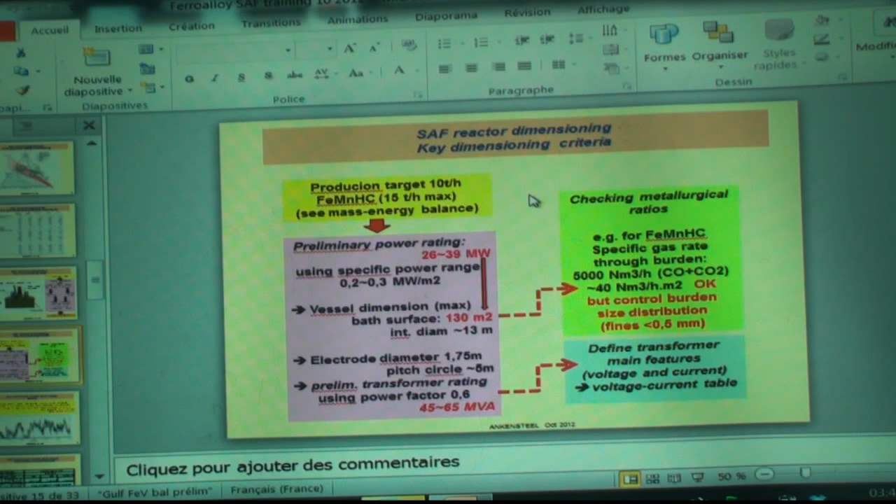So yesterday we were here. I explained that using the mass energy balance and defining production target, you can define the required power, and then there was a discussion whether

putting a margin on the production target or putting a margin on the surface to have an improvement potential from 200 to 300 kilowatt per square meter specific power rate.

The specific power rate of 200 to 300 kilowatt per square meter, of course, is a kind of empirical result of production. But if you read all the papers I sent you, coming from publications of constructors like Demag, like Pyromet, like Hatch, you will see that these figures are really industrial figures, and they are based for dimensioning furnaces. The industrial furnaces really work like this.

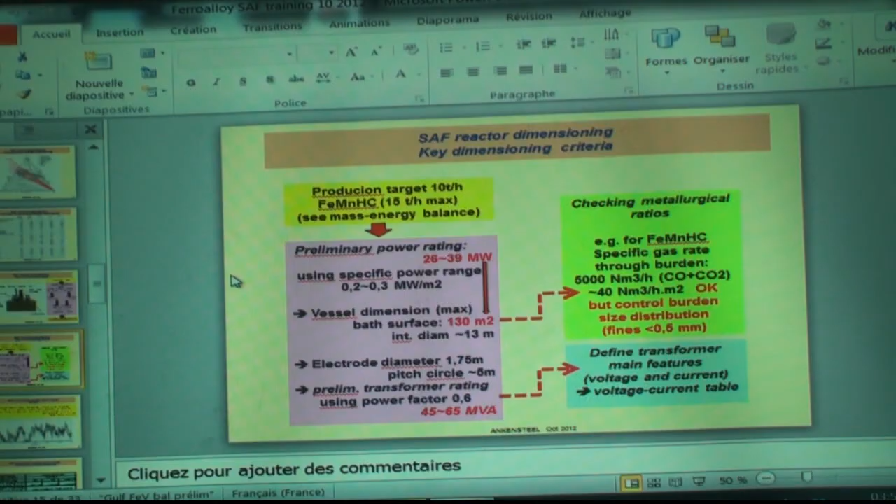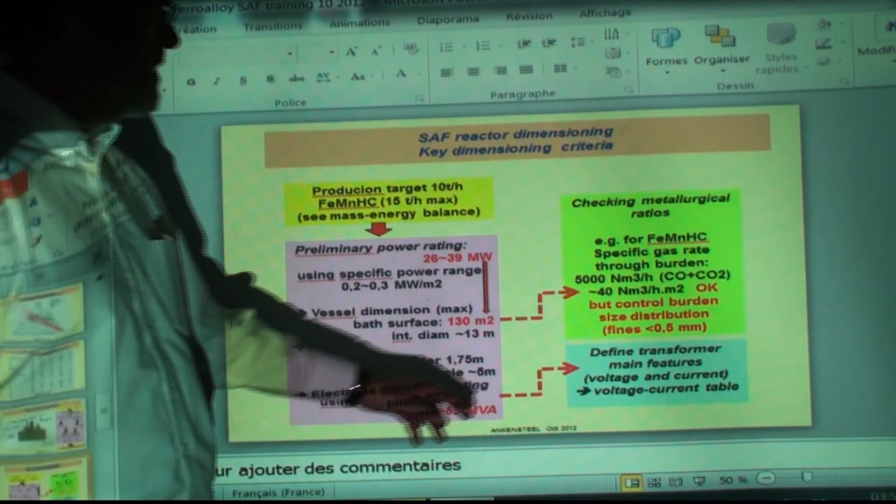Okay, then we discussed the preliminary transformer rating, and Mr. Jin said, yes, but that's not enough. It's not enough to define the MVA. No, of course, it's not enough. And we are continuing to define not only the transformer main power figure, but also to define voltage and current to be used by the furnace.

The power supply constitution of a SAF, like it's suggested here by Mr. Jean, is the same as that of an EAF. But of course, what is important is to define appropriate voltage and current. That may be different. And what are the very basics of this?

First, again, to maximize the specific power rate requires to really obtain arcs, to have submerged arcs, and not only electrode immersed in slag and giving only a resistive Joule effect to the slag.

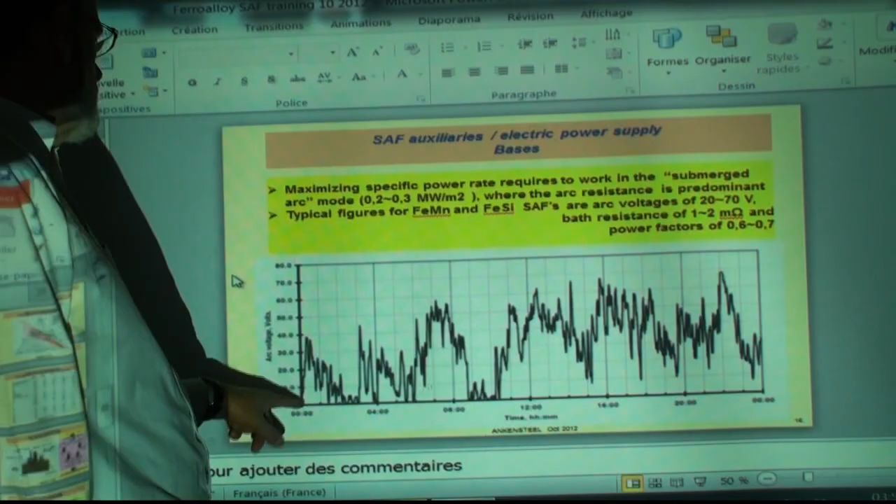The typical arc voltage that you can obtain in ferromanganese and ferrosilicon, but also ferrochromium furnaces, are arcs of 20 to 70 volt. This is typical, and this is arc voltage measured on a ferrosilicon furnace over time. You see, of course, it may vary, but on average, it is 30 to 40, and the fluctuation is mostly between 20 and 70 volt.

And the time scale here is in hours, 4 hours, 8 hours, 12 hours. So when they did these detailed measurements, this was a real important result, because before, people were always struggling, saying nobody was inside the charge to see the arcs. So this was really important to measure, and it has enabled also to establish the level of bath

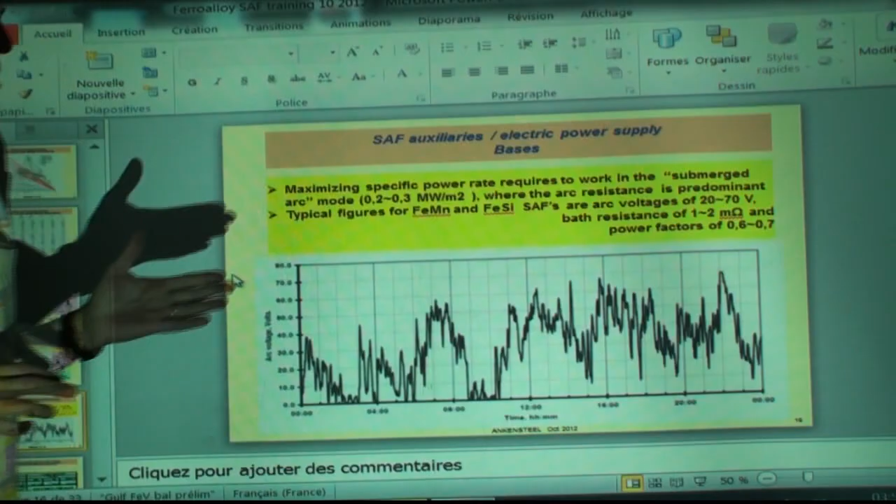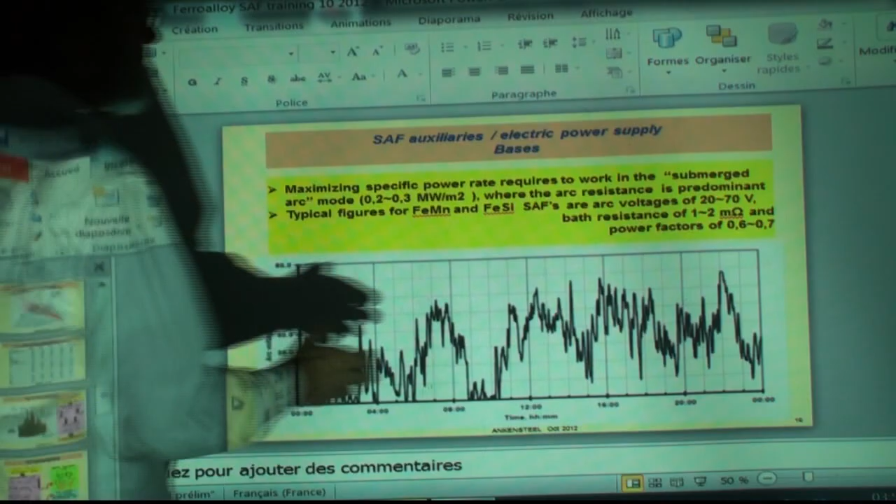resistance, and this is about 1 to 2 milliohm, and of course the power factor you can easily observe. The power factor was 0.6 to 0.7, and these features are the base for calculating provisional voltage and current values.

And this table is an estimative calculation of secondary voltage and of power for the furnace for which we made the balance. For this one, we are going to define the electrical working, the electrical setting for this furnace, for this 130 square meter furnace.

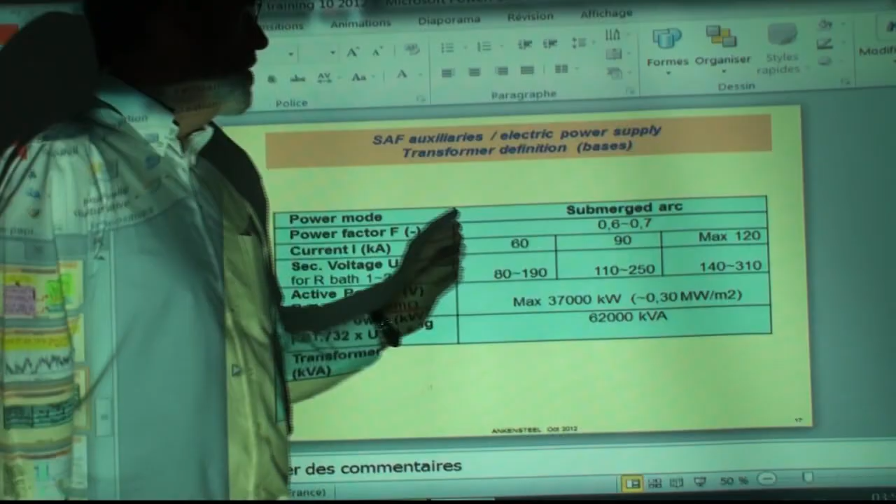And what we assume is that we are going to work with a nominal current of 90 kiloamps. The size of this furnace is more or less also the size of your high metal ferromanganese furnace. You agree? The high metal furnace is about 120 and something square meter.

And this type of furnace has electrodes like I indicated, electrode diameter of 1.6, 1.7, the pitch circle is 4.5 to 5 meters, and through such electrodes you can easily use 100 kiloamps.

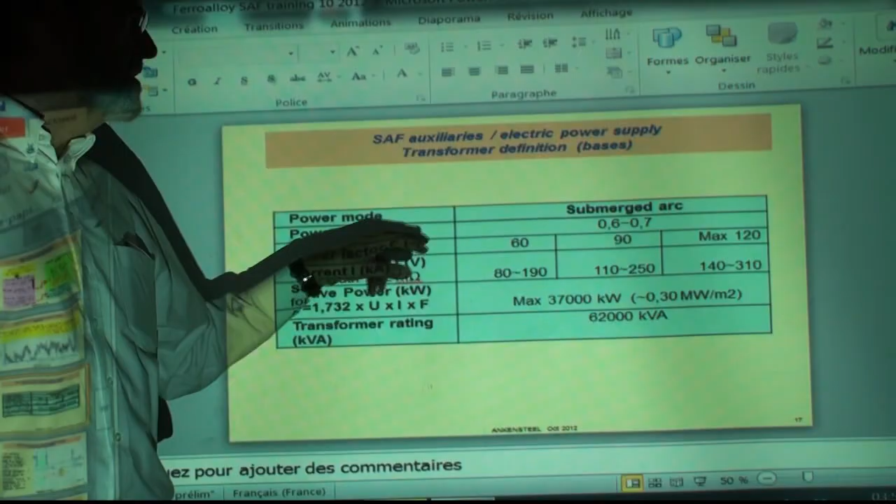One question: this power factor F is minus? What's minimum, minus? Power factor F plus? No, this is not minus. This is just saying that the unit—there is no unit. It's a pure number. You understand? This is the sign. Normally you have volt or amperes or meter or square meter, and here it's no unit, it's a pure number. That's the meaning. It's not minus, pure number.

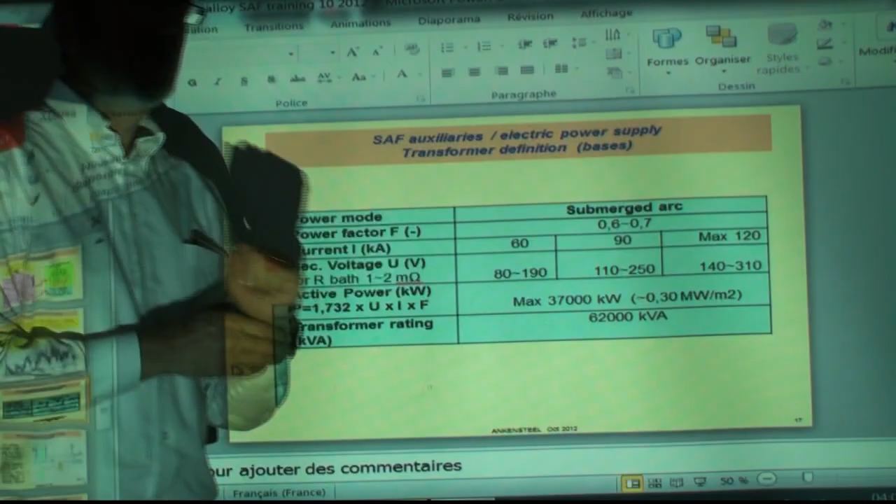Okay, how to set typical values in case of 90 kiloamps? In case of 90 kiloamps, this... you made a picture, this is okay, I can...

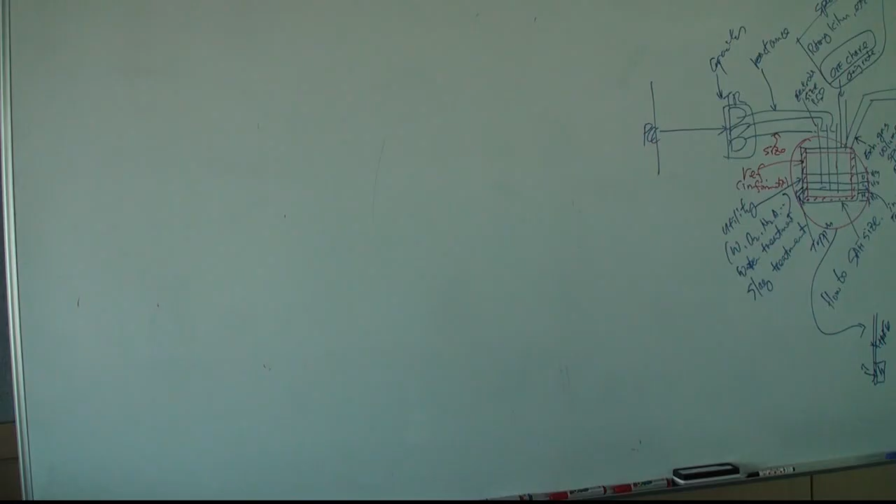Okay, what we're doing now is very approximative, because we all know that in an arc furnace the real electrical relations include reactance, and so we should calculate real impedances with a resistive part and a reactive part. We simplify the problem by saying that, to calculate a voltage, we will add an arc voltage plus a bath resistance times the current.

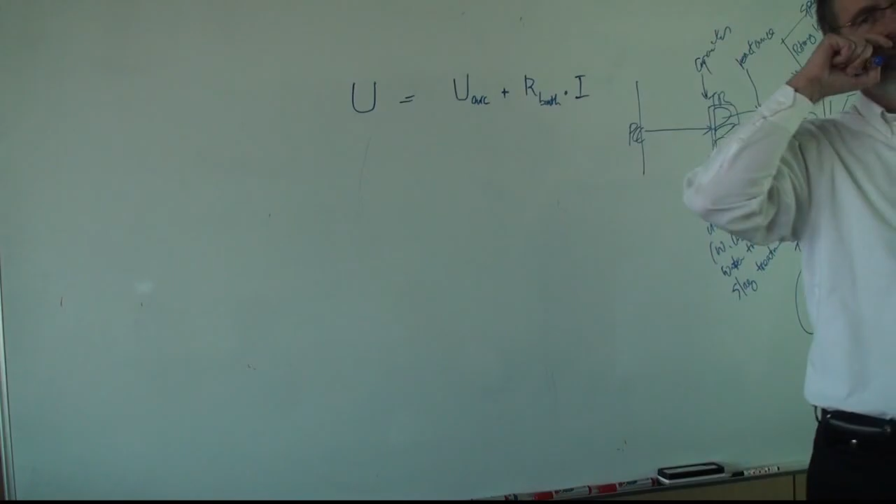Of course, I know, actually we should do this in vectors, using impedance. But let's do it to explain how it works. Here, in this case, we have 90 kiloamps. And you remember we had arc voltage from 20 to 70 volts, if we work in the range where most industrial furnaces work. And then we have bath resistance from 1 to 2 milliohm. So we have 1 to 2 milliohm times an intensity of 90 kiloamps.

So the result of that is 90 to 180 volts. It's okay? Yes, it's okay. Do you agree? Yeah. And now, if we assume that there is no important reactive part, we add these two, and you see the result is we are between 110 and 250 volts. It is here. And what is the power associated? If I take this total voltage, the power is 1.73, this is root of 3, times U, I, and power factor. Let's calculate.

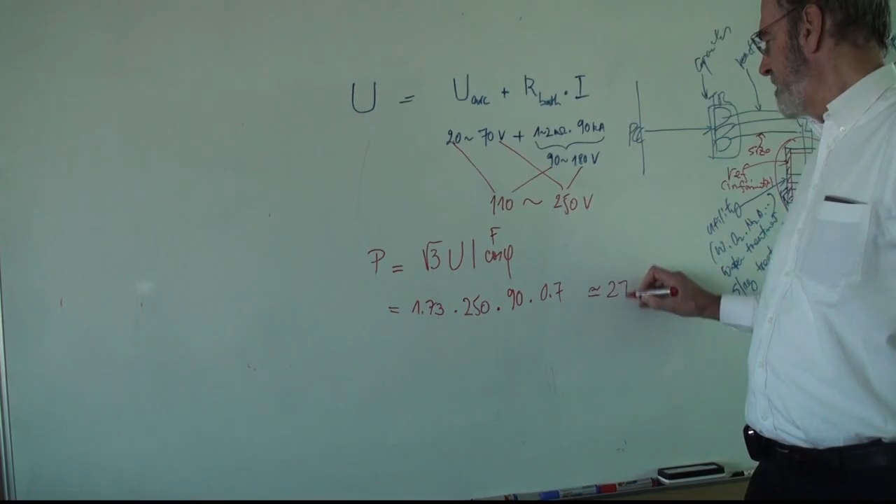Cosinus phi is the power factor. Let's take the higher value, 250. Let's take a power factor of 0.7. Can somebody calculate? 27,247. Right. 27. Okay, about 27. Yes. Okay. So you see, here we have 27. That's for here.

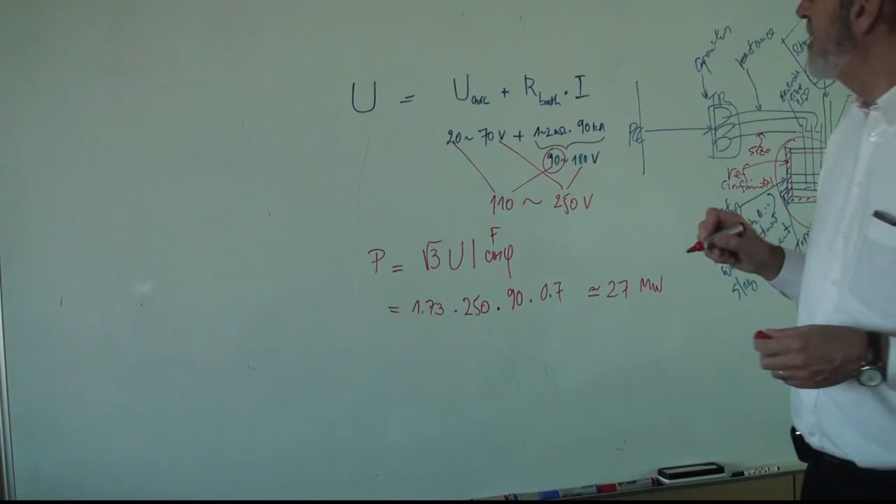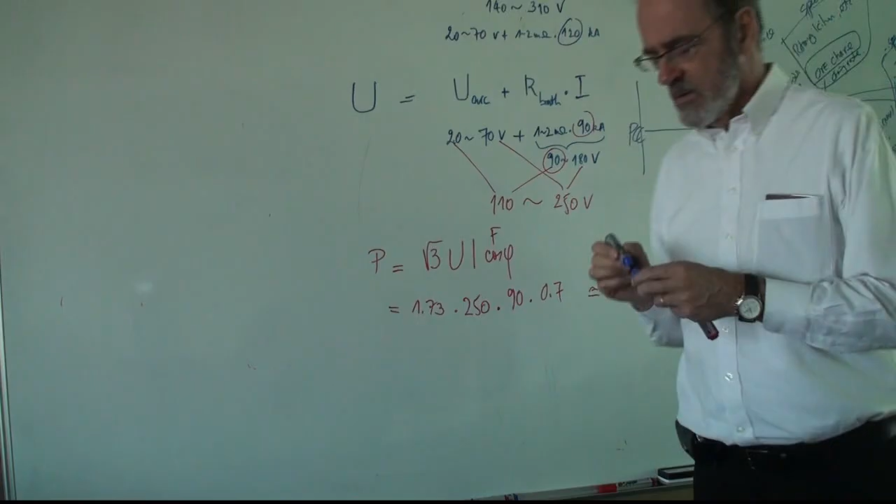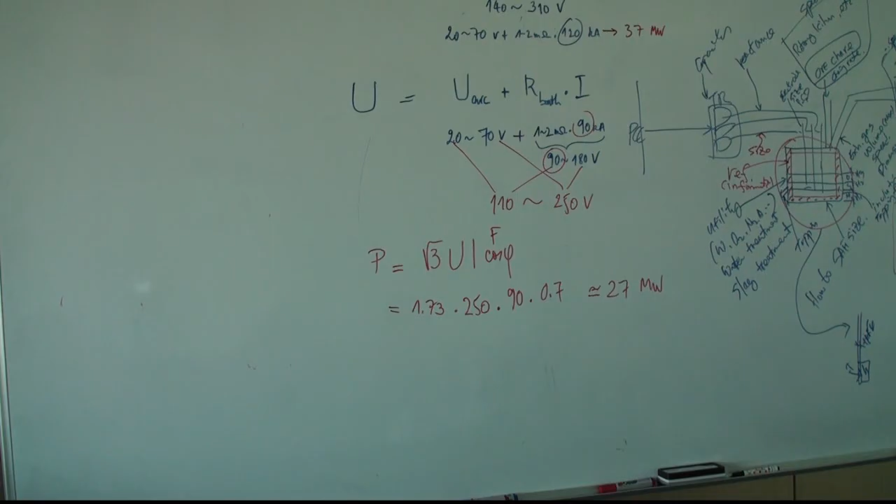So let's do it for 120. For 120, I made the same exercise. We have 20 to 70 volts plus, so this is 120 and 240, 70 plus 240. Yes. And if you then calculate the power for the highest, 310 volts, you find out 37 megawatt. You see, and then dividing by the surface, here we are roughly a bit lower than 300 kilowatt per square meter, and here we are roughly at 200.

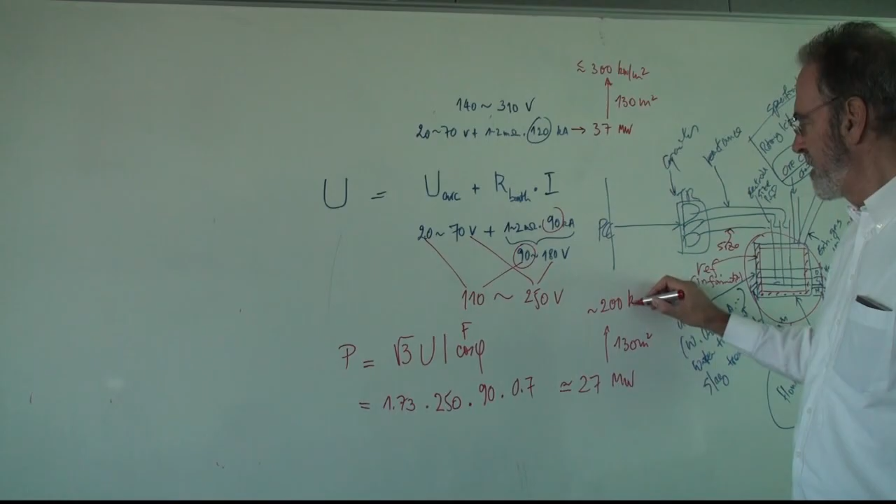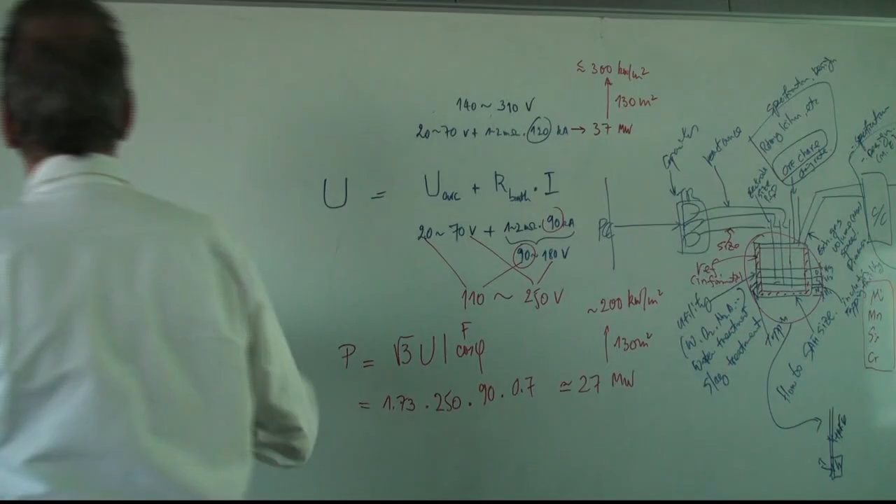And so you see, just departing from the electrical capabilities and from the electrical basics, we find again the level of specific surface power that we used. It's all coherent. I don't know if I am clear. I'm saying the following. We do a mass energy balance. We find out the power, and then, using the specific power rate range, we define a surface. This is what we did yesterday.

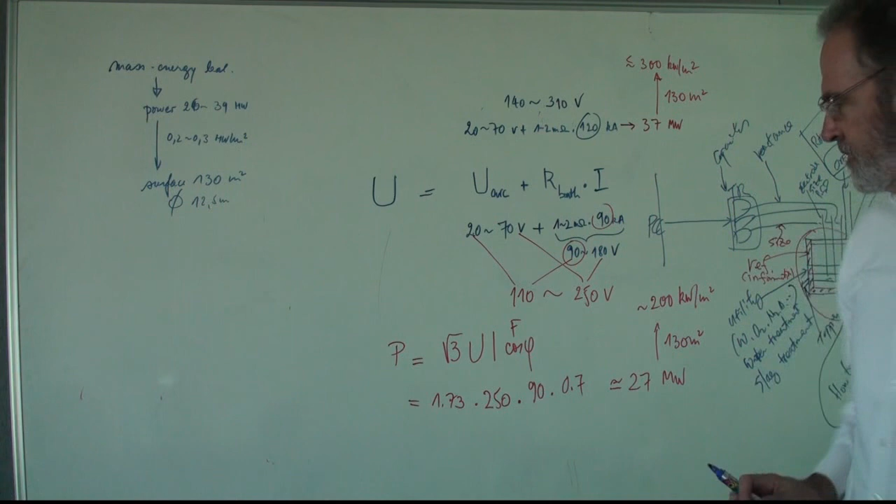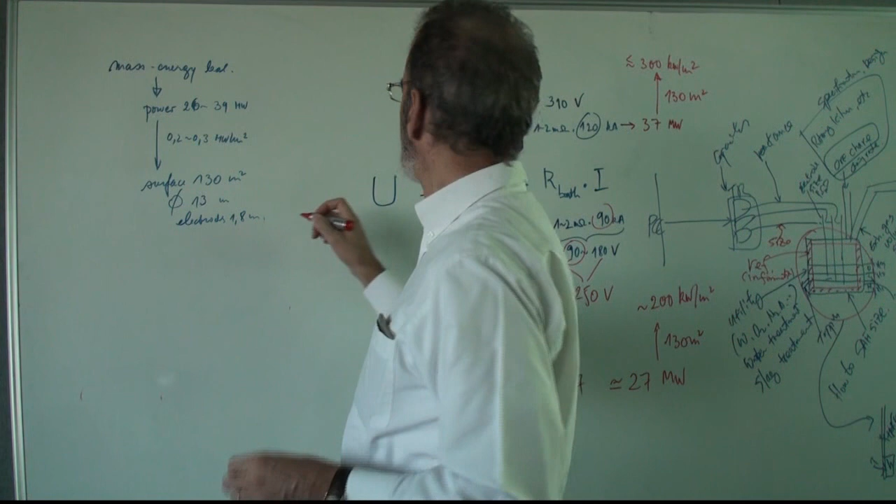Yeah? And now this is then 12.5, no, 13. And this is electrodes. And what I say now is different. Having this furnace dimension and departing with these electrodes, I'm able to have 90 kiloamps up to 120 max.

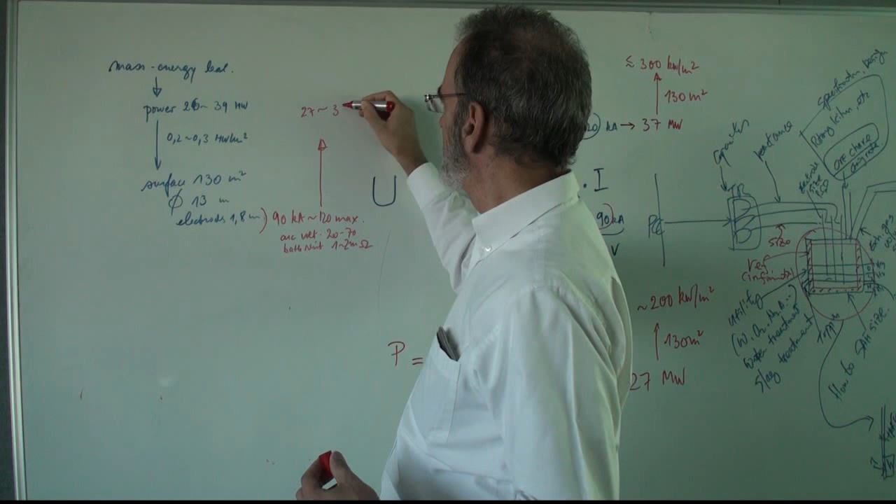Working with ferromanganese, ferronickel, etc., I will have arc voltage of 20 to 70. I will have bath resistance of 1 to 2 milliohm. Using this, I find out some 27 to 37 megawatt. You see, it's just to say it is coherent. The two approaches are different. And so, this is confirmed.

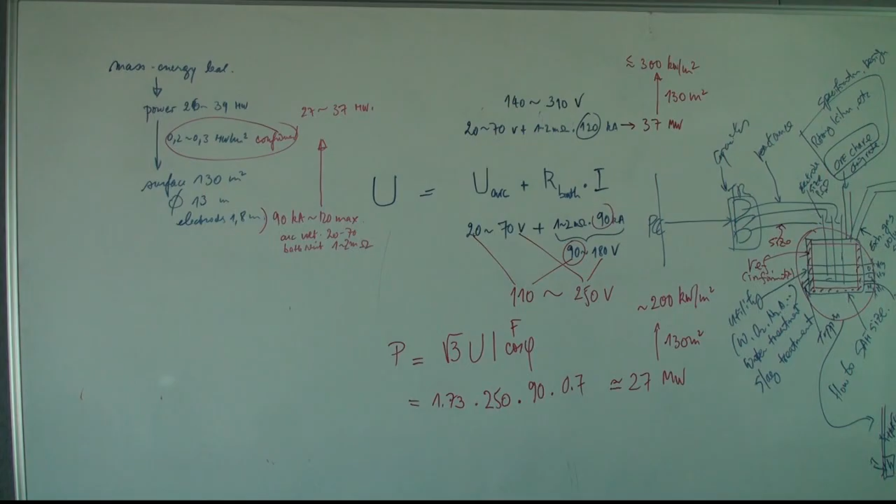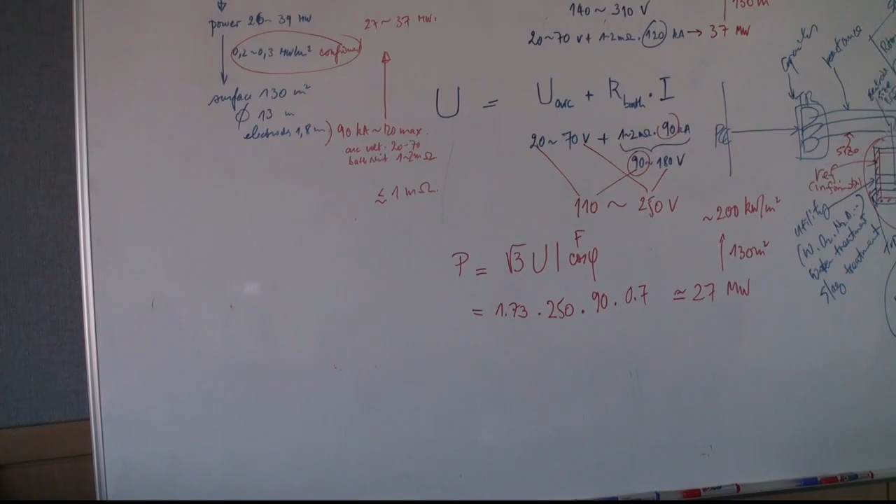And I can tell you that these guys told me that when the electrodes are new on this very big furnace, they have a resistance slightly below 1. But the electrodes are not new, because they are self-baking electrodes. When they are in good shape, the shape of the electrode you see when you extract it, when the shape is like this, that is good shape. And they told me that when the electrode self-baking does not work well, it's something like this. I'm not a specialist of electrodes. And then this is increasing. The resistance is increasing up to more than 2.5.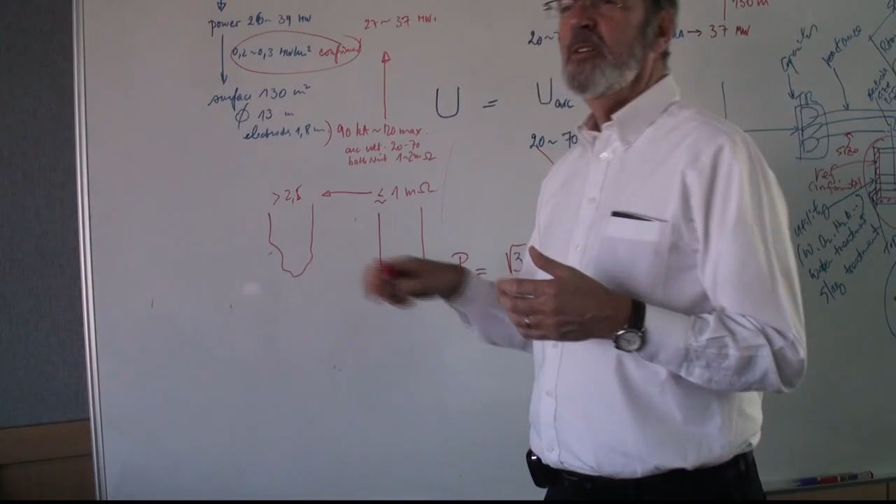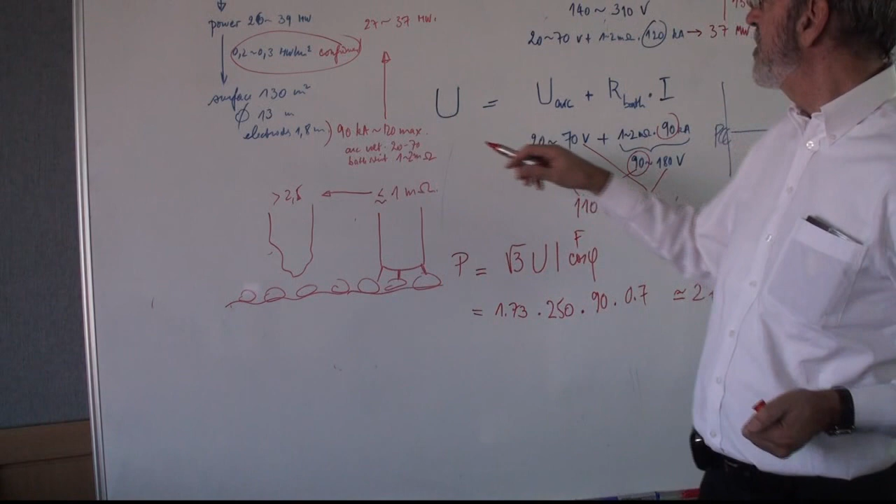Okay. But at the same moment, when you have this, you have less arc voltage, because you understand that these are not good conditions. If you have coke here, it's not good conditions to form arcs. This is good. This is not good at all. So, in this case, you have a higher resistance. So this second term is increased, but this term is 0. So there is a kind of self-balancing effect.

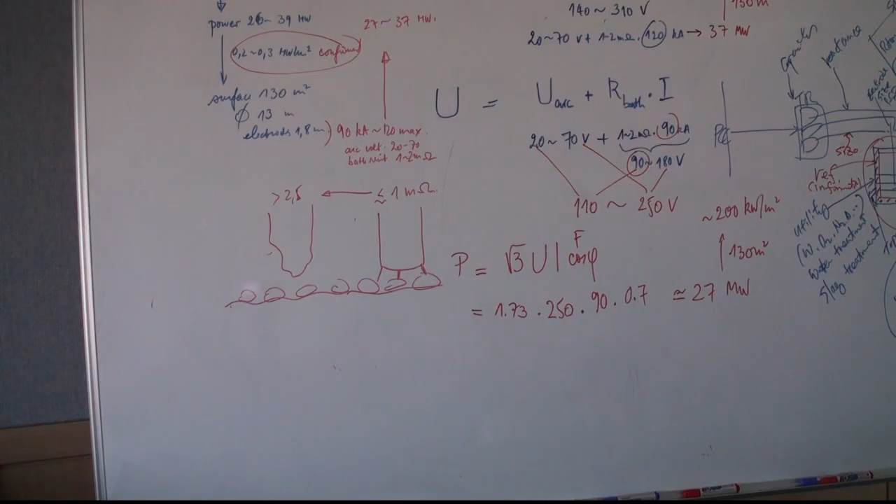Do you include self-baking and the electrode lifting system in the presentation? No. You mean here. Okay, yes, you're right. This one. And hot coking.

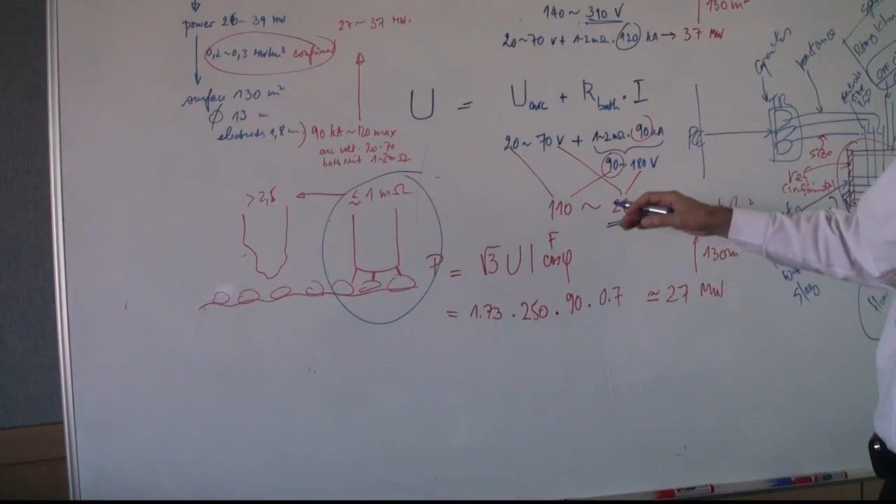Okay, so you see, these things are more or less well known. It's just that there are limitations given by experience. And nevertheless, the target is to work like this. And then working like this, meaning having good arcs, and at the same time being able to work with the highest currents, enables you to have high voltage, from 250 up to 300 volt, and then to have the highest specific power.

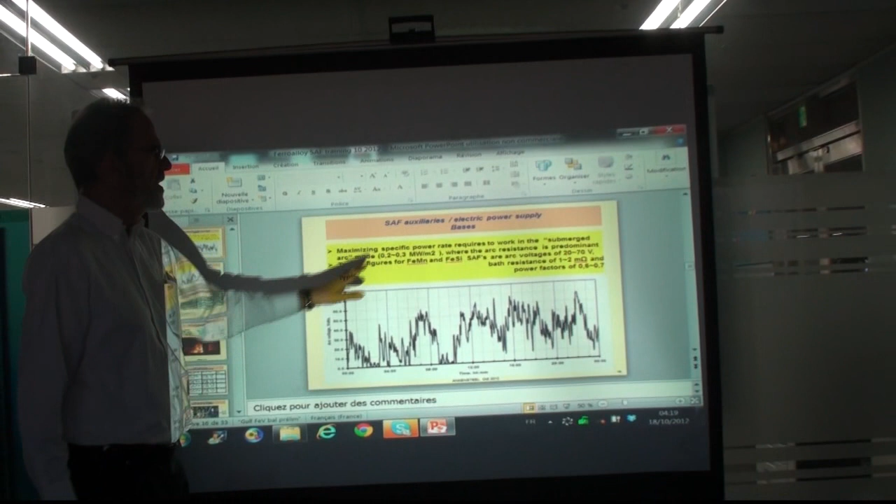What about the bath resistance 1 to 2? It is always applied the same, isn't it? Can be different from the condition of O, no? It can be different, of course. You know, in the publication you will see this. This was measured for a ferrosilicon furnace, but I know that for ferromanganese it's the same. Same?

Yes, ferromanganese, ferrosilicon. What I have heard for ferronickel, you may have this also, but it's more difficult to have always an arc voltage like this, for the reason that you have much less coke. Meaning you have the problem that you don't have coke floating everywhere. Because instead of adding, you remember, 150 kilo per ton of ore... Coke? By coke. Because you see, coke is giving hot spots to stick the arc on. I see.

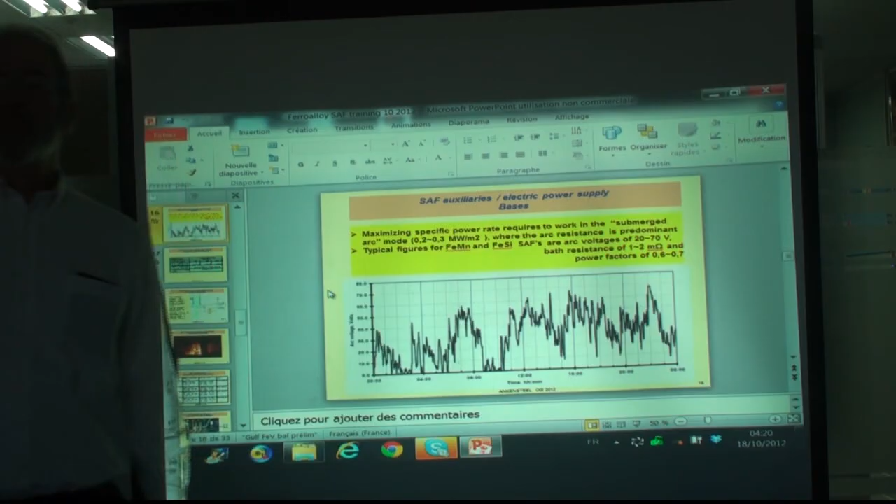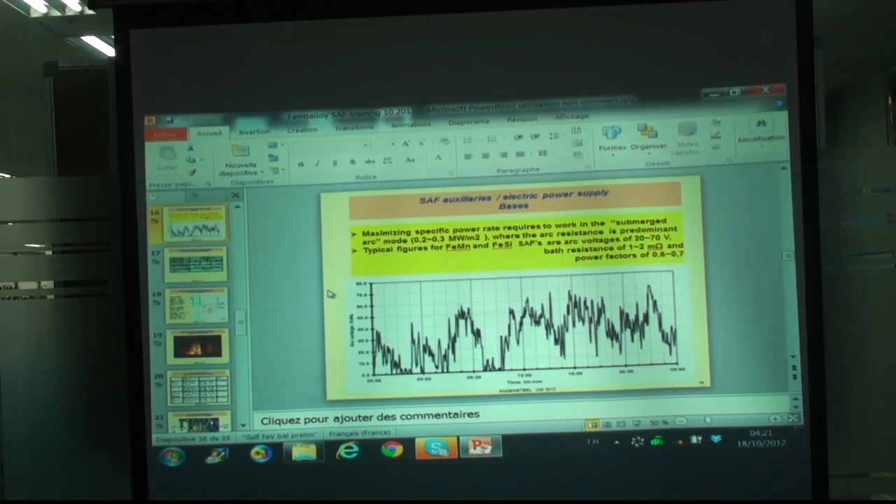And therefore, the largest ferronickel furnaces put the very biggest electrodes, over 2 meters, I think, and they increased the current because the voltage was not so easy to guarantee due to that. But of course, we will see in the balance of ferronickel. It depends also. Here we have 25 kilo coke. In some cases, you may have the double, which is a better condition. But this is very few.

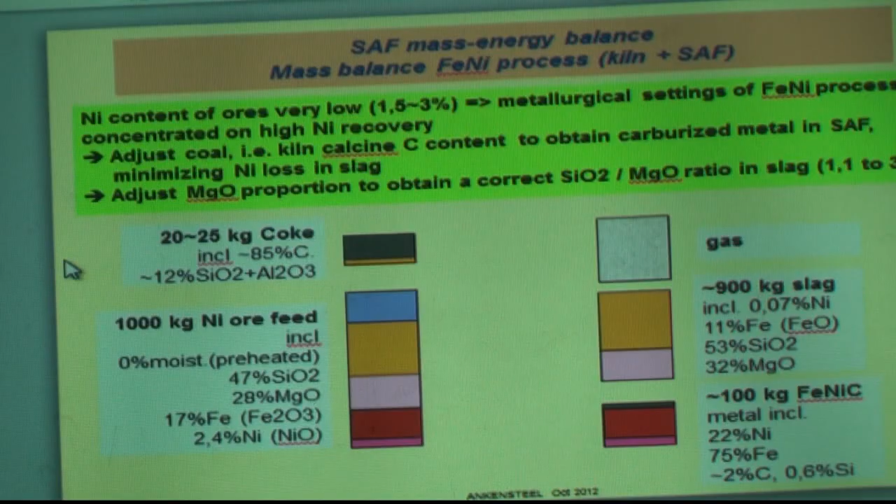So in this case, what would I say to the electricians that are defining the transformer? I would say to foresee as base this working point, but as a maximum case this one, and maybe for periods where for any reason you would decrease the current, this level. I think this definition should be enough for people making the transformer. We must be able to work like this and like this. So your voltage steps must be roughly from 100 to 300.

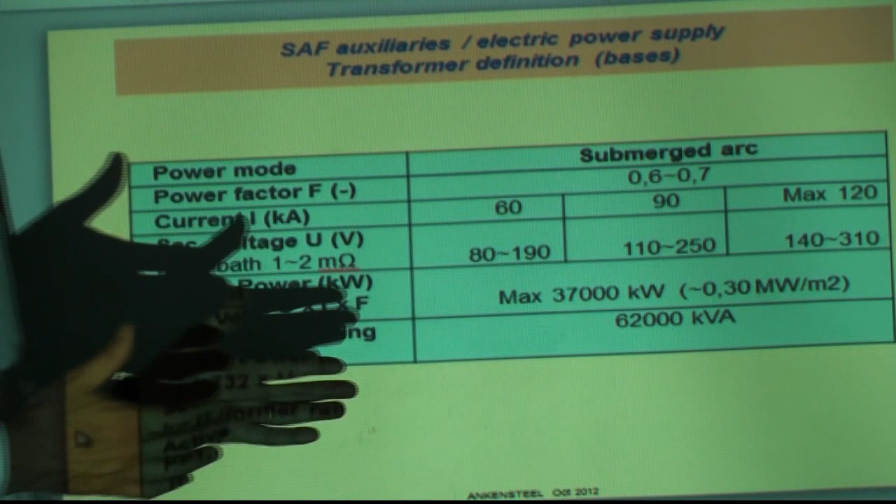And so if you have 10 steps, you can decide it's by 20 volts. Of course, on a smaller furnace, this is all much smaller, as I give you in the short note. On the pilot it's much different. Because in practice we cannot define this resistance, but we expect the resistance is under 1 milliohm, we think. You think under 1 milliohm? Yeah. This is experience from the large ferromanganese furnace. They have about 1 milliohm, but more when the electrode is in bad shape.

And you say HiMetal, they told you smaller than 1 milliohm?

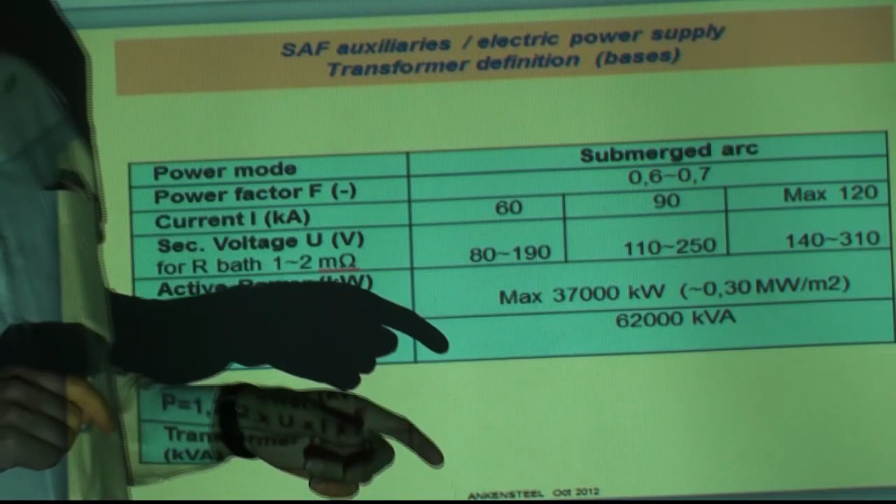You must give me a set point. How do you increase it? How do you make higher voltage? Or you know there are bigger furnaces. There are round furnaces.

40 megawatt is around the maximum that exists. Not EAF, SAF. For round furnaces, you will hardly find furnaces. Look. No, it's 50 megawatt, but using 130 or 140 kiloamps. Very high current. But on a round furnace with 3 electrodes, it's difficult to go over this. Then you may have furnaces with higher power, but these are the furnaces,

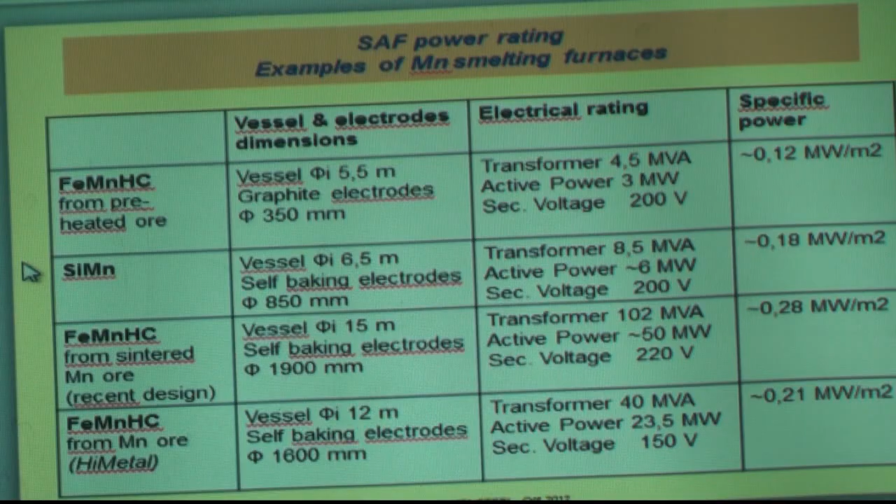the long ones. But I will not recommend that. Yes. Okay, I mentioned it later on in my presentation. It's possible.

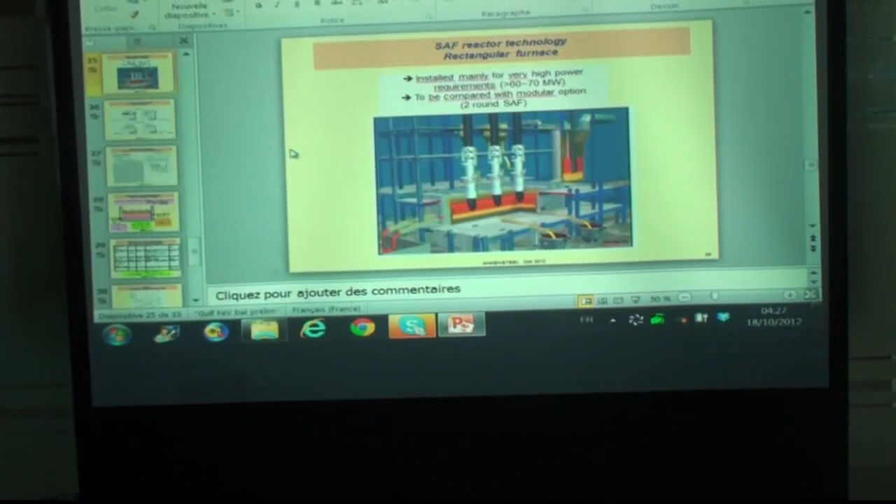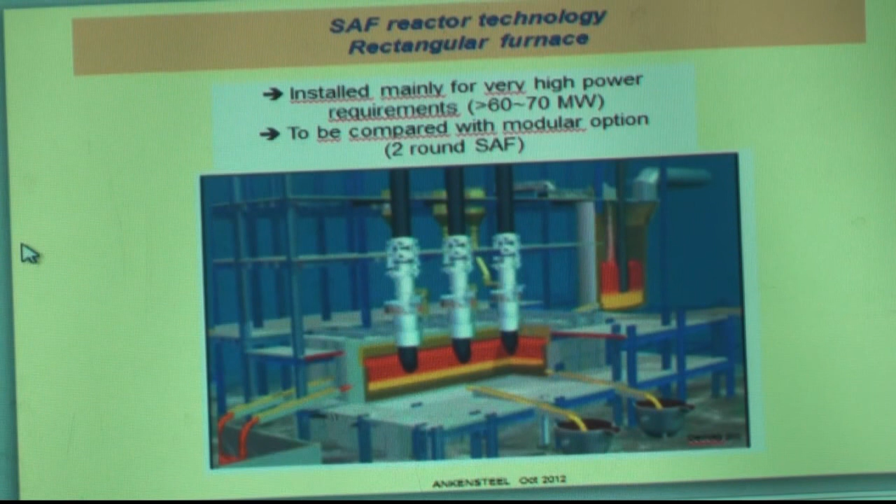For me, I'm not a specialist. I don't know. I cannot define a furnace like this because there are many difficulties in the design. Because a round furnace has a round shell, round refractories. Everything is symmetrical. But here you have problems at all corners. Here you have corners. Not easy to handle. Okay, it exists.

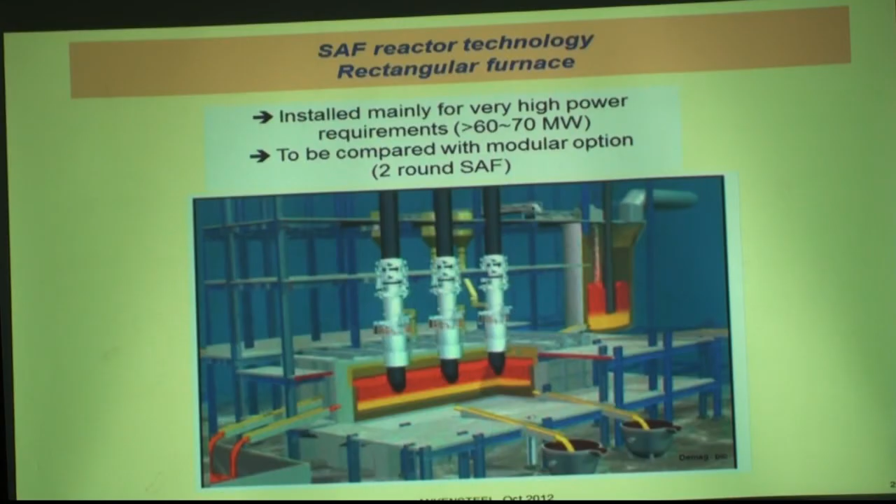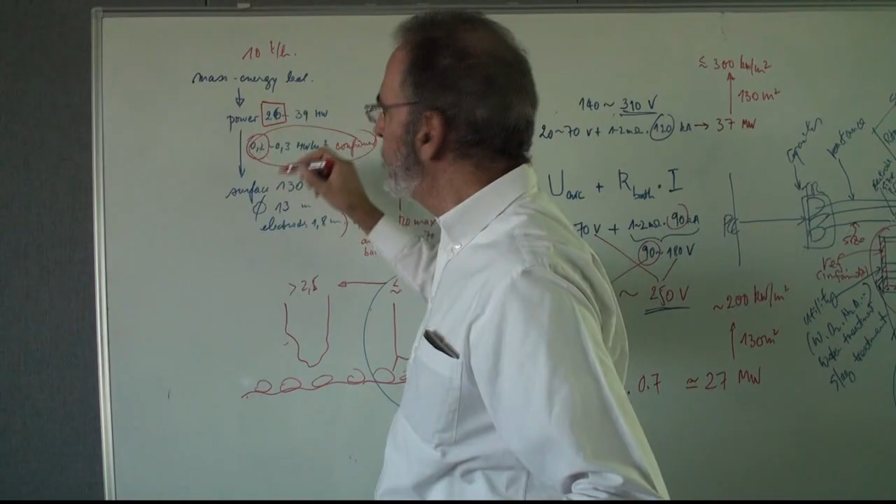Okay. So, if I would summarize, this shows that the right way for me to dimension the furnace is to define the nominal power. You remember? This was the nominal power for 10 ton per hour furnace. But then to define the surface using 0.2 megawatt per square meter, and this is giving this furnace. And then having this, you define the electrics, of course, to obtain at least this power, but you can define the transformer to obtain a higher power. Then you will be able to work at 0.3 at the highest, at the record level.

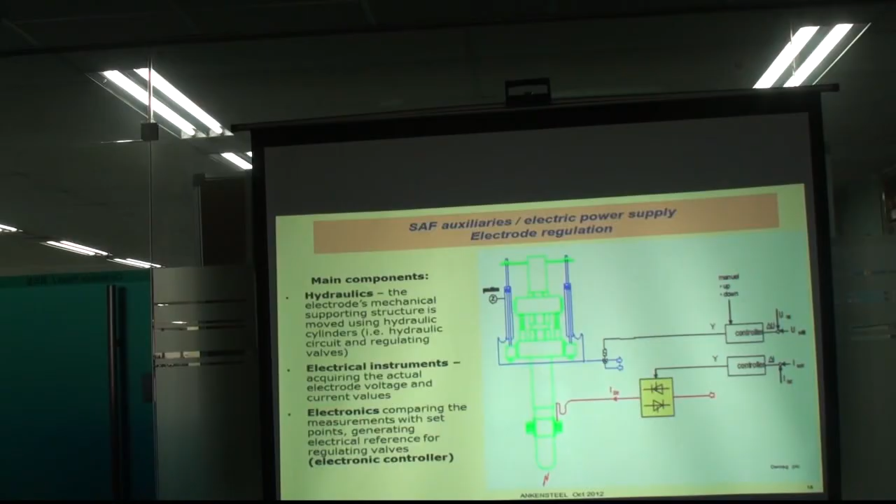Electrode regulation. Do you need that I speak of electrode regulation, or I think it's the same principle as for EAF? It's different, I think. Same? The principle is the same, but you know, there are two big differences. The first big difference is the weight of the mechanical part of the electrode. It's much bigger. That's a big difference, of course. But this big difference is compensated by the fact that the variation speed is much smaller.

But then, I'm not a specialist of this, but the basics are the same. The ERS is the same as the EAF. Yes. Same principle. Can you use the same software? I would say yes. Then I would recommend to make some simulation and to compare with that of high metal, because they have one, so it's good to compare, because as I told you, what is different are the constants of the regulator.

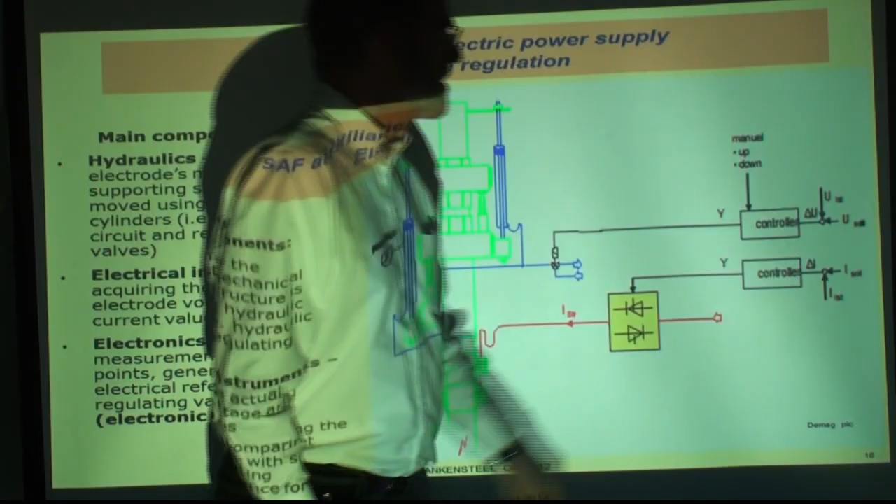It is based on measuring the voltage, on measuring the currents, and reacting from time to time to adjust either the voltage or the impedance.

How to lift down the electrode? This is only hydraulics. How do you say piston? Yeah, piston cylinder. Cylinder. Yes. You know French.

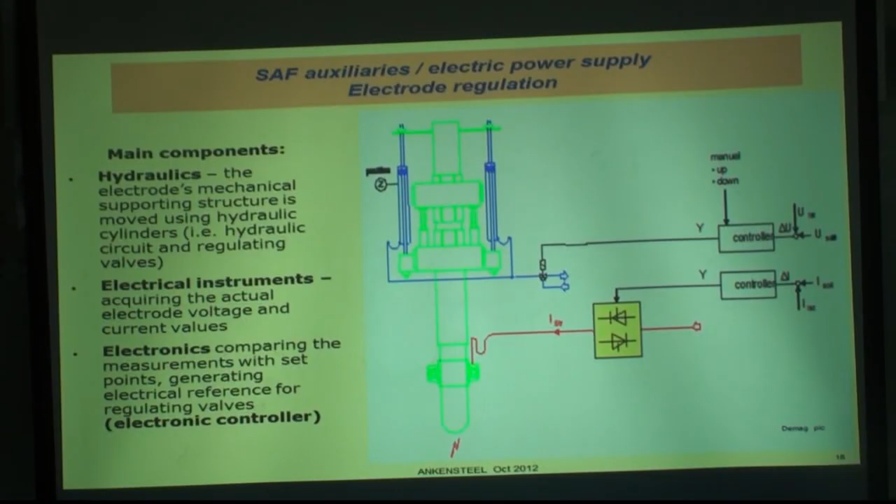But can you explain the mechanism of the electrode down, and the upper side is raw material coke, yeah? Yes. You charge at a very high point. It's a very long envelope, a very long pipe of steel, and it's going down and cooking continuously.

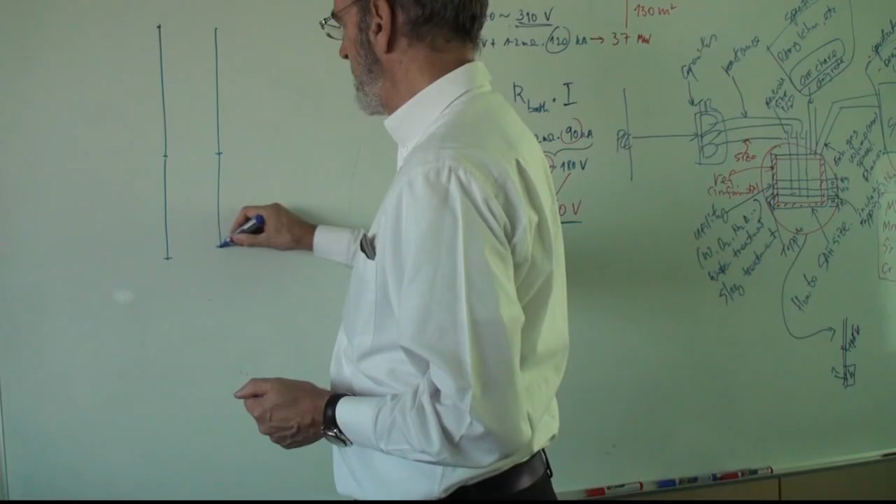It descends, and I would like the mechanism, the mechanics. I know it's an electrode that has a big thin round plate, and then you weld a new plate after. Here. And this part is already hot, and here your steel has already disappeared because it's too hot.

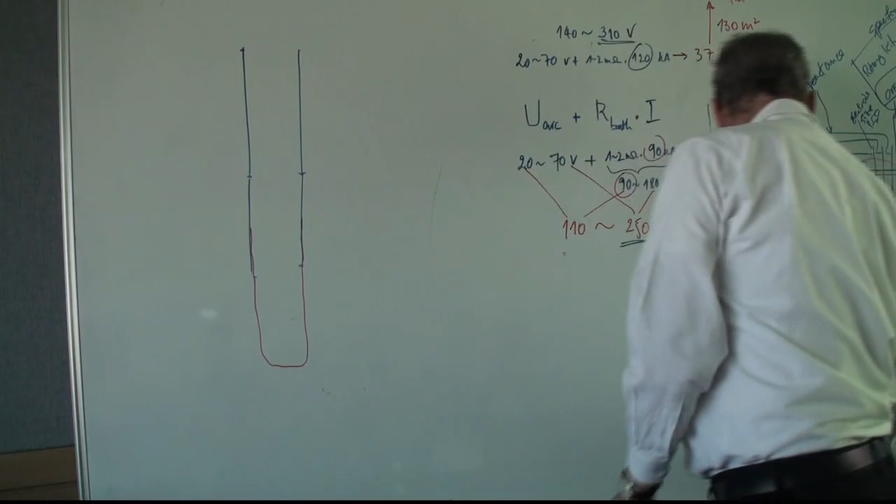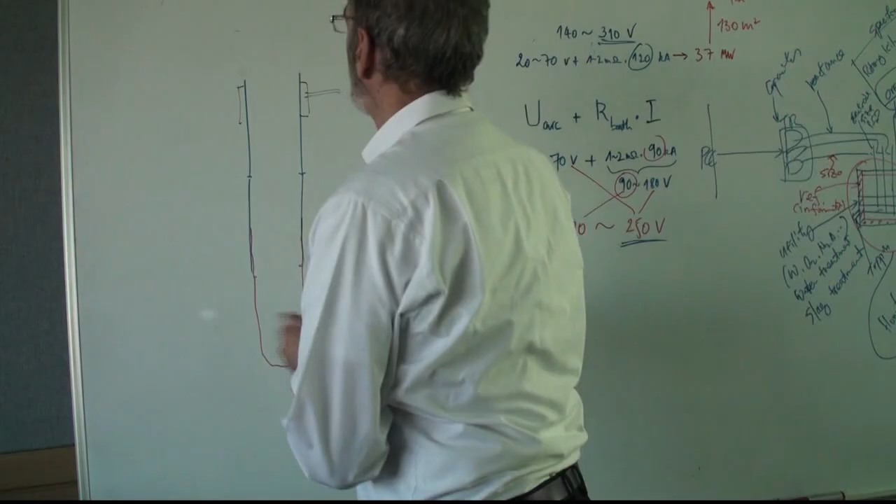At the top you charge material, and then it descends. This is what do you say, clamps. And then again when it's worn, like for graphite electrodes, you hold it and you open and you let it descend, and after you let it descend, you will weld a new pipe here to compensate the wear here. But when you open the clamp, the electrode...

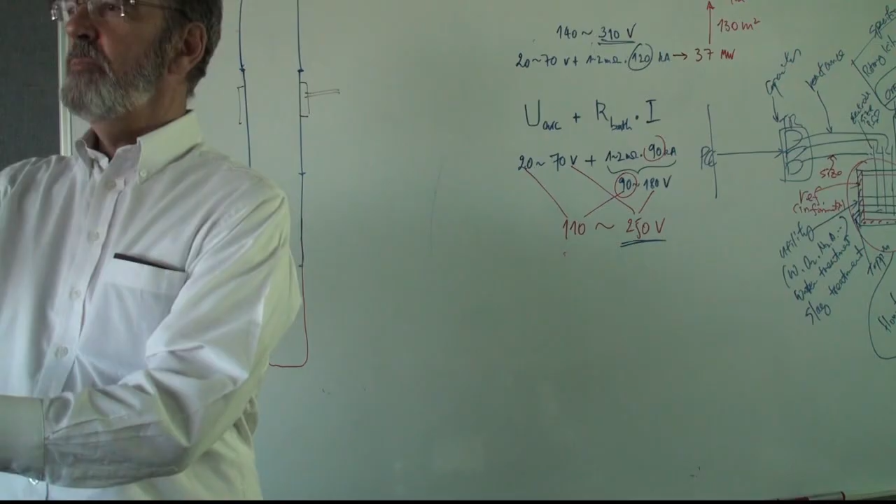No. Actually you have two systems. You open the one, the other descends, and you clamp and you go up. Okay, I'm not a specialist of this mechanics.

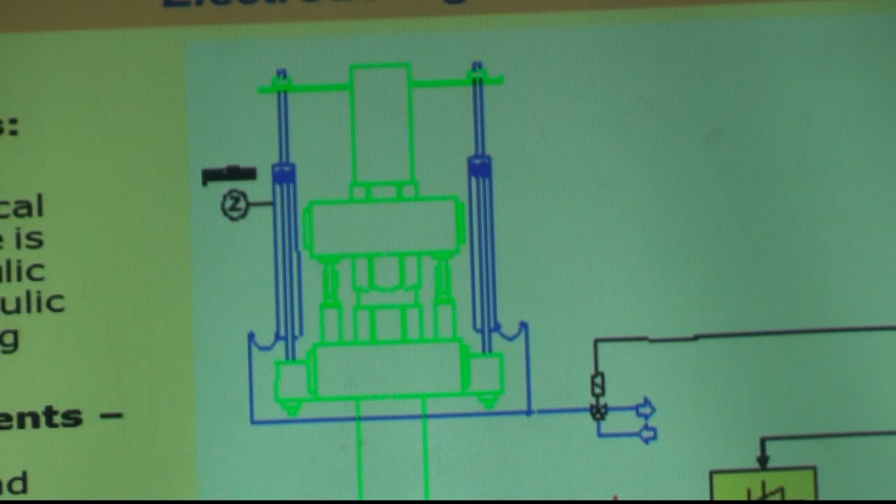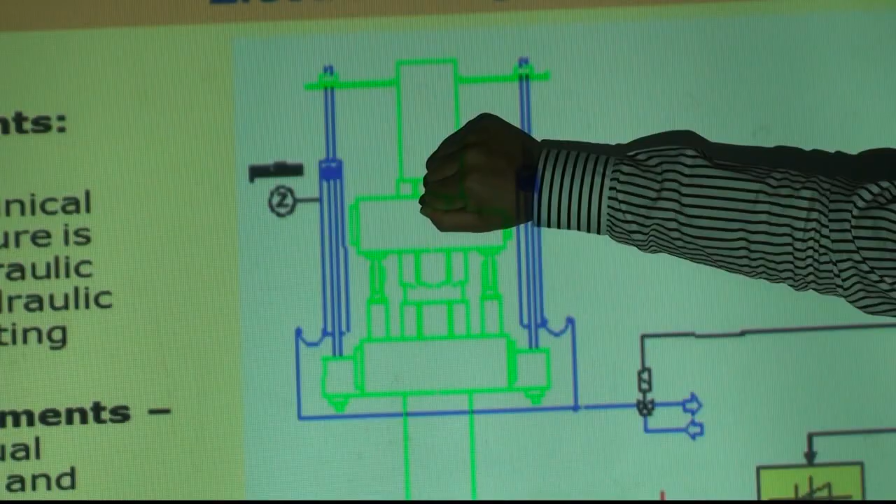Here you have a double clamping system. You must have a double system. I guess it's like this. It's first lifting down the whole part, lifting down the electrode, and stop it, and lift up just one clamp, and open the bolt.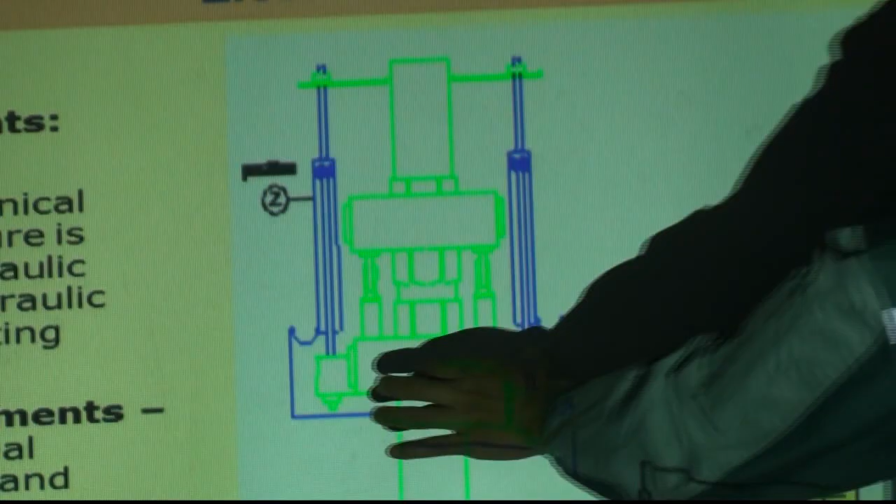Just guess. Okay. I think you know it better than me. I know, not the details.

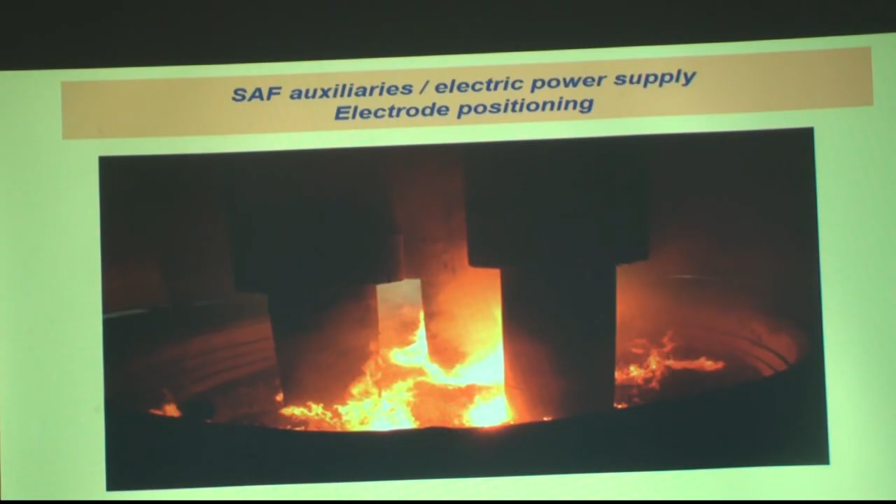And now we continue. The key parts for having a sturdy furnace working on long campaigns without stoppage, without failure, are, of course, what we just discussed, the electrode supporting and regulation; the refractory lining; of course, the material charging; the wall cooling of the vessel; and the metal tank. These are the key parts that must be well designed.

Okay, I will comment only the refractory and the wall cooling, because material charging, I'm not a specialist of this part, because I would say it's pure mechanics. What is not mechanics is to define where to charge. And I told you that on a large furnace, you may have 9 or 12 or 15 charging points. This is a lot.

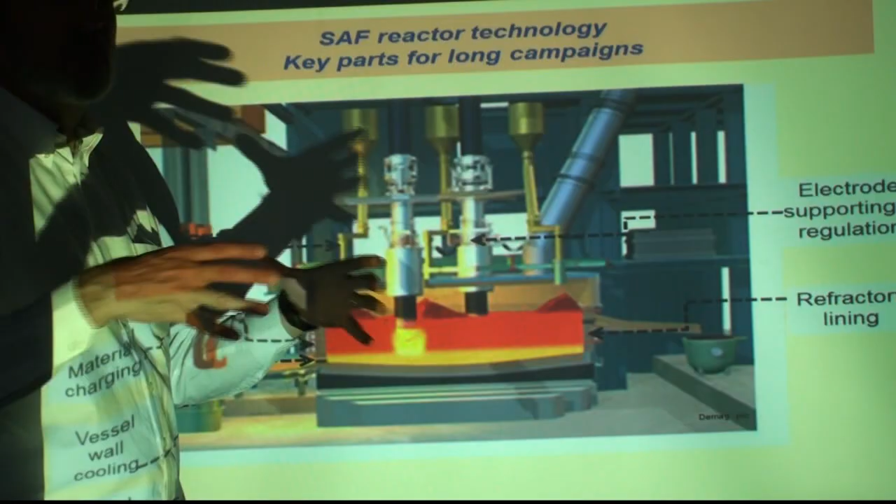And my experience in that field is that on a small size furnace, roughly a bit more than 4 meters diameter, even there they had, I guess, 4 or 6 charging points. Actually, in this case, it was well designed, but if you have a small furnace, you cannot have everything too close, and the pipes come like this, and the reason of bad functioning of the distribution of material was the wear of the pipes. The pipes were corroded and destroyed, and so the material went out before it should.

And at that time we defined a new steel grade to withstand the higher temperatures and corrosion for this small furnace. And afterwards it worked perfectly. Okay, so let's discuss.

This is a picture of RHI, which, you may know, is the largest refractory supplier, I guess, worldwide. It is the former Didier, German company, and Radex merging all together. Today, RHI. Here, it's a nice picture of an SAF, for instance, for ferromanganese. Could be. Can be also for ferronickel.

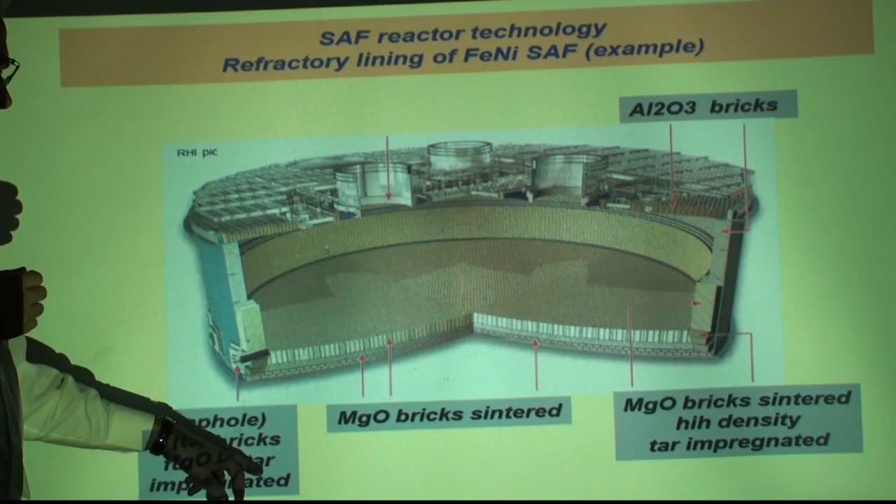What you see is that fundamentally there are 4 families of bricks plus 1 derivative. The 4 families of bricks that can be used are the magnesia bricks, MgO; the magnesia bricks fused, because most of the magnesia bricks are sintered; then the magnesia bricks sintered or fused, but tar impregnated. You have the alumina bricks, which are normally used for the upper parts, which are not so corroded, and you may have magnesia chromium bricks. This means MgO, Cr2O3.

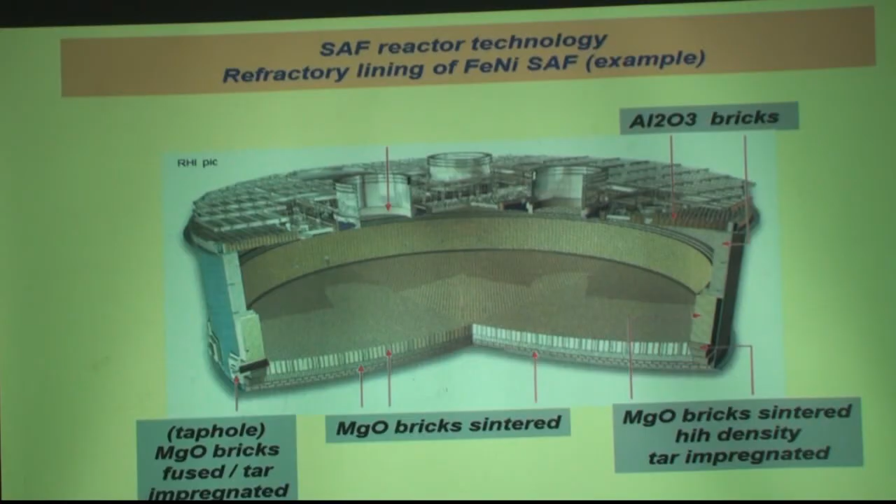You know how magnesia bricks are fabricated. You crush magnesia rock, MgO rock. You pre-heat the crushed material. Then you sort it. You recrush it when you have very fine material. You press it with different additives, different binders: resin binders, spinel binders, and you press it to give the form of the brick. Afterwards, these bricks pass through a heat treatment furnace to be baked at a very high temperature, something like 1800 or 1900 degrees C. These are the sintered bricks.

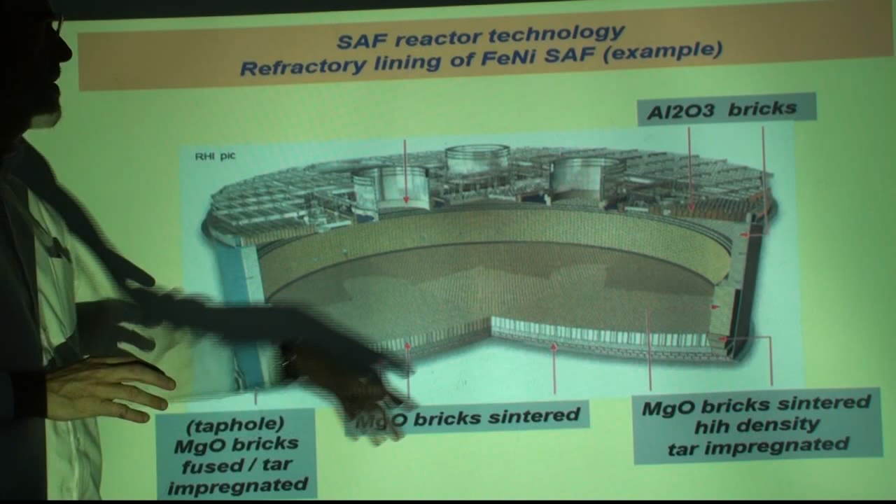And the fused bricks, as you can guess, means that you go through a very special SAF furnace working at 2100 degrees or so, and you melt the magnesia, and afterwards you tap and you cast, so the fused bricks are from material that has been melted. Of course, they are very resistant, but these are the most expensive as well. So for a ferronickel furnace, basically, I would recommend this. And today, with the progress made by high-density MgO bricks, I'm confident that this holds for a long campaign.

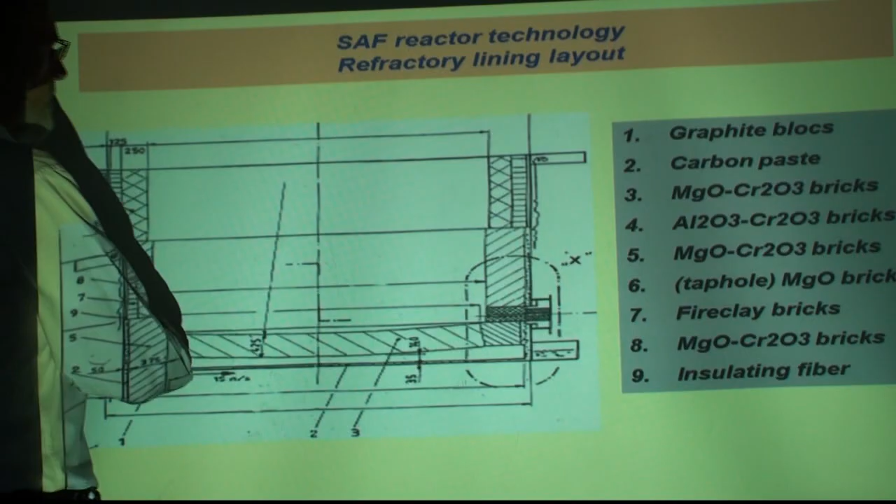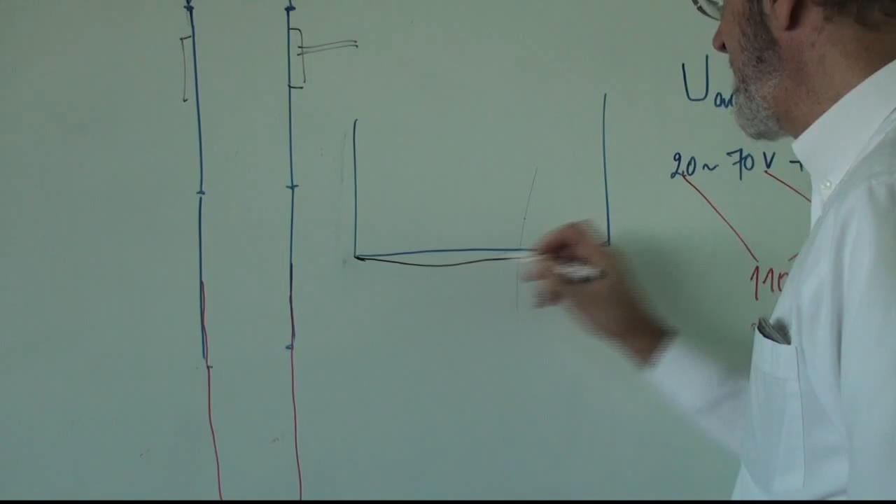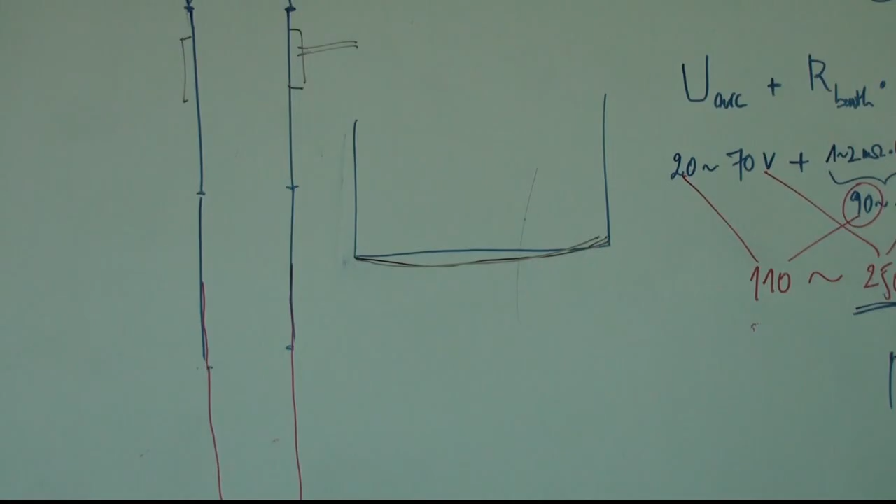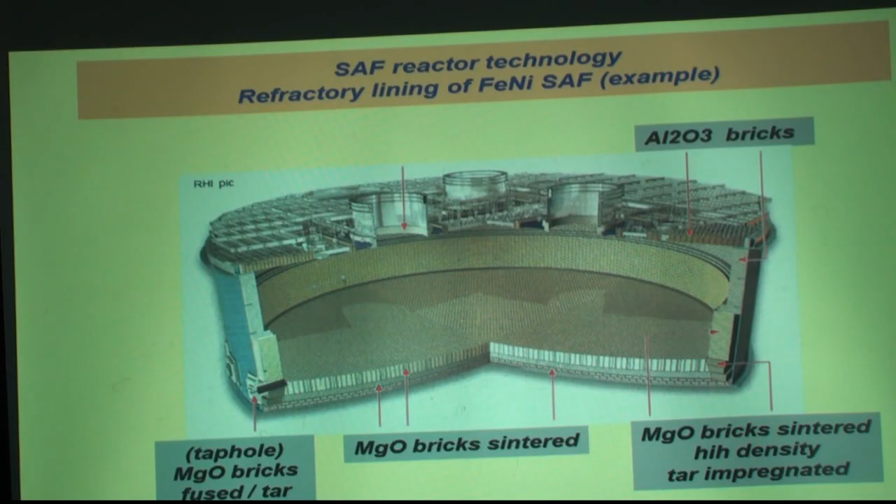I give you an example. This was on a small furnace, a real-life example. This is interesting because this was an old design, and in an old design you have a kind of concave bottom. In the old design, the bottom was not like this, it was like this. I exaggerate. Because the bricks' characteristics were not so good, they could expand, and this gives you a direction for expanding. Today it's no more required. It's difficult to see details, but they never make this round bottom on new furnaces. Here you have it, even on a small furnace, a kind of 5-meter furnace.

So this is the steel shell. You can see these are the so-called skew bricks. These are magnesia chrome bricks, and this also, I guess, magnesia chrome bricks. And below the magnesia chrome bricks, there is a layer of graphite blocks.

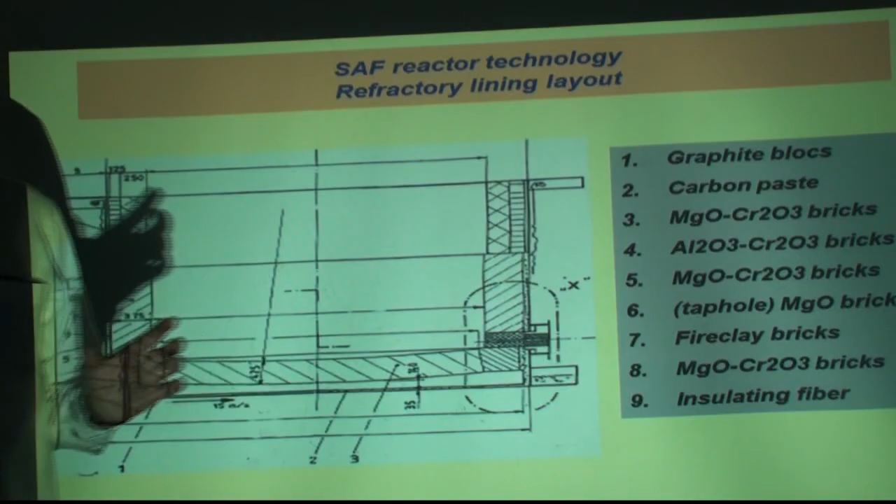The objective here was to not be too insulating and to not freeze the bottom of the bath, because if you have an insulating material, no, it's the contrary. If you have graphite blocks, and here the arrow means that you have circulating air, this is going to organize that you have a small solid shell.